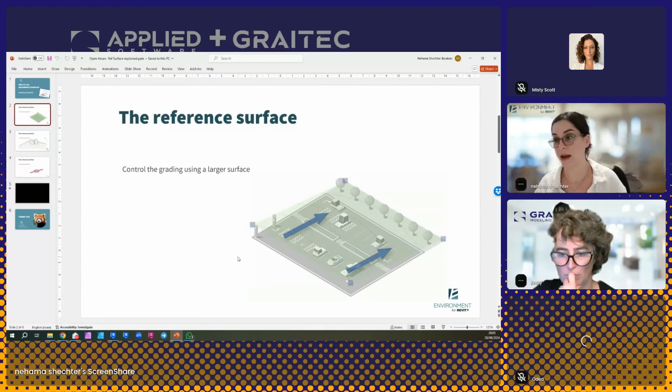So essentially, the reference surface is like a theoretical surface that represents the grading and the slopes of an entire area. Just like this parking lot can be graded with just 4 points, but then every part of it can just align to this grading, right?

I gave a really good example, imagine a roof, where you define the slope of the roof, but then every shingle on the roof conforms to the same slope—you don't have to define it over and over again. That's what we're doing in Revit to create a very efficient modeling process. Just like in this example, I already have the grading of the building pad.

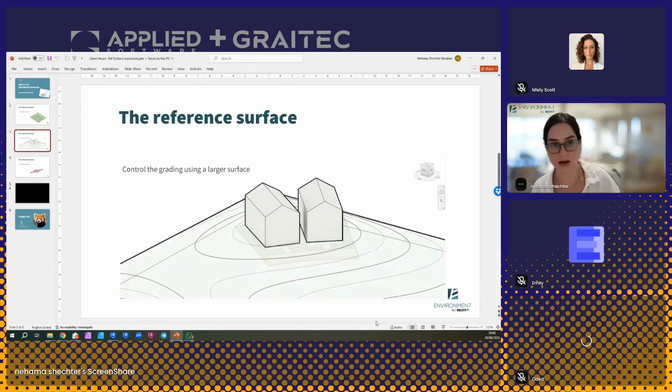As my design gets more details, I add the more details to it, but I don't have to redo the grading of every area, yet I still have a 3D model. So these Revit topographies and this method of working is really helping me both in the design process, but also in the modeling process as well.

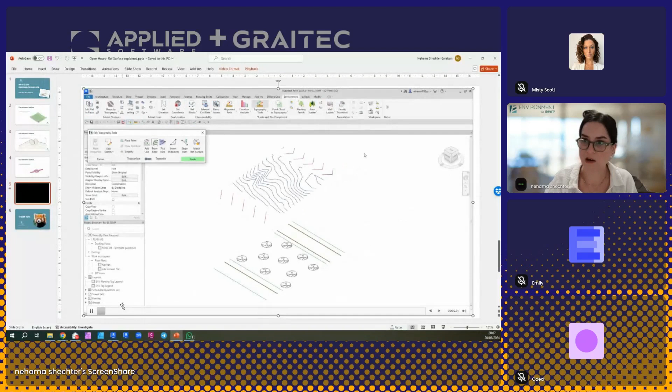So for example, if we take really complex surfaces like this one, I don't have to calculate the elevation points for each part over here. I could just create a reference surface with 4 points and have everything conform to it. That's some of the things we talked about last time with complex topics in topographies. I actually prepared a really fast example of how we can work with topographies with the toolset that makes this topography and grading very flexible.

Now, I saw a lot of people asking in the Q&A, can we import this topography data from other software? The answer is yes. We can import that from Rhino, from AutoCAD, from Civil 3D, and use it and continue to design with it in Revit.

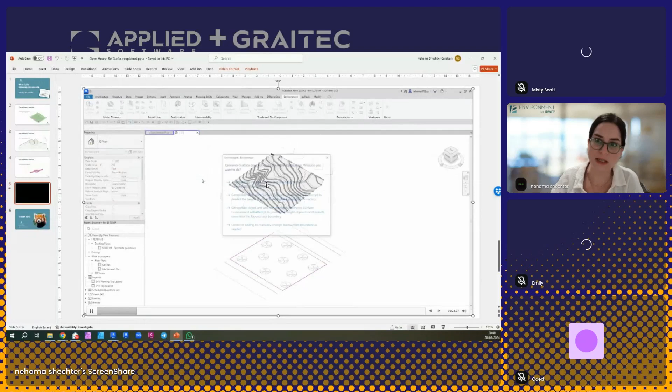In this example, I'm showing you how I'm designing a topography from AutoCAD using Environment tools. You can see how originally this topography was created with contour lines, but now with Environment for Revit, I just added points on this AutoCAD surface. So once I have this 3D topography in Revit, I have so much information that I can extract from it.

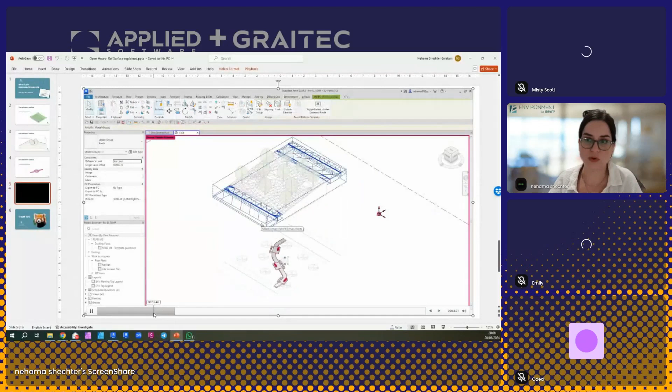I can extract the volume. I can create a proposed topography that will later allow me to understand the cut and fill values of everything. So essentially, you can see an example over here of how, in 2 minutes, I took an AutoCAD survey and just modeled my entire site. When my site is 3D modeled in BIM, I have so much information I can extract from that - the amount of trees, the volume of the land.

And over here, you can see an example of how I can take my own design and start to design on top of this 3D survey. So I'm designing a 3D path connecting these 2 streets, and I'm doing it really easily with one of Environment's tools called an alignment. And this alignment is 3-dimensional.

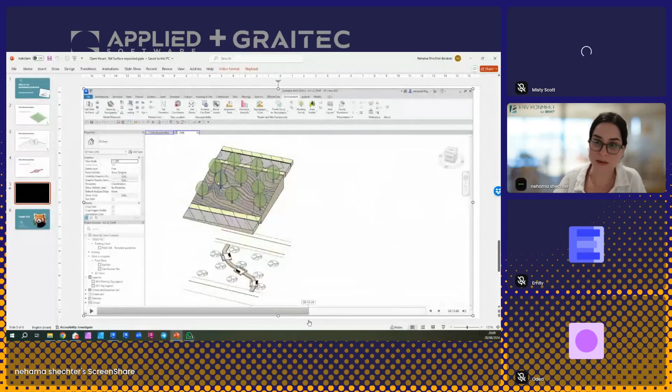And because it's 3-dimensional, I didn't have to calculate anything. I just created a path, and now I can just take the existing topography and conform it to the new path. And I can show you another workflow of how easy it is for me to just get my design on top of the existing data.

Now that's on a very small topography, but it can be done on larger scales as well. And then each and every part of this model can provide the information of the cut and fill calculation for this part.

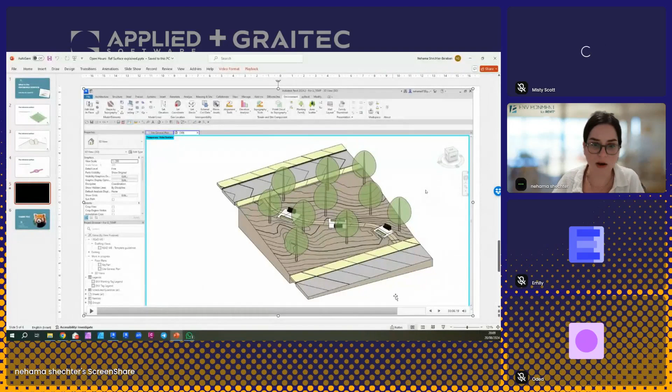So we talked about the reference surface. We talked about the amount of tools that we have in Environment for Revit that could give you all the flexibility of the design, and that's the toolset. Basically today we have over 70 tools that are built in naturally into Revit that allow for very flexible design. We have tools for planting as well, but we're going to talk today about topography in general.

Emily, do you have any interesting questions on the chat over there?

Hi, I have lots. And I just wanted to say I put it in the chat, but yes, we will be trying to answer all questions after the fact and send it out with a recording a few days from now. But give us some time, there are lots of questions. So, some of them are disappearing on me as I'm looking at them.

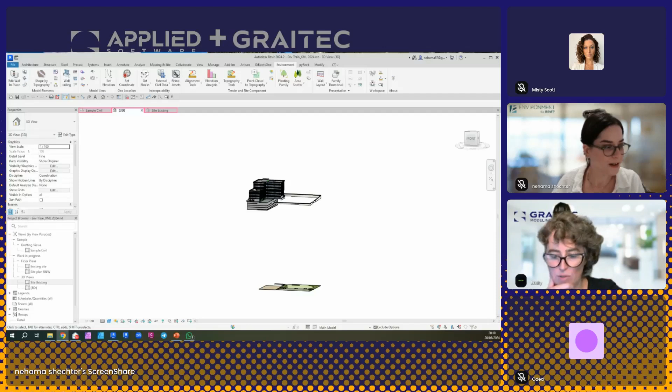So there was one there that I saw about topography - related to structures like tunnels, can we handle underground elements? Is that too much for now? No, it's actually a really nice question.

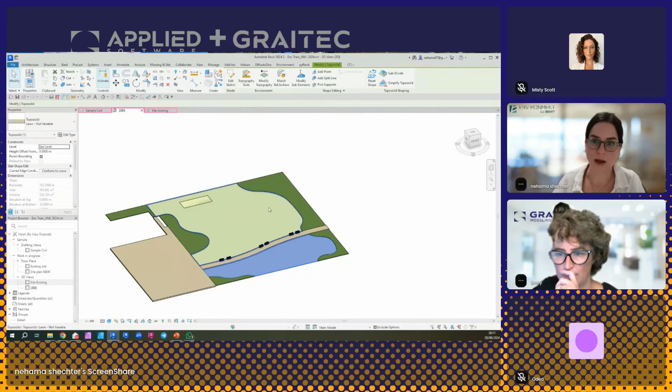Let me create a fast example. So in Revit 2024, Autodesk introduced the element called the toposolid, and essentially it's a solid topography. So let me just create a square shape topography very quickly to give you an example of why we care about the fact that it's solid. What does it give us?

So let's take a type - we have a lot of types of topography that we can define, we can define the layers, whatever. So let's just take the gardening and soil, that's a very basic topography that I have over here.

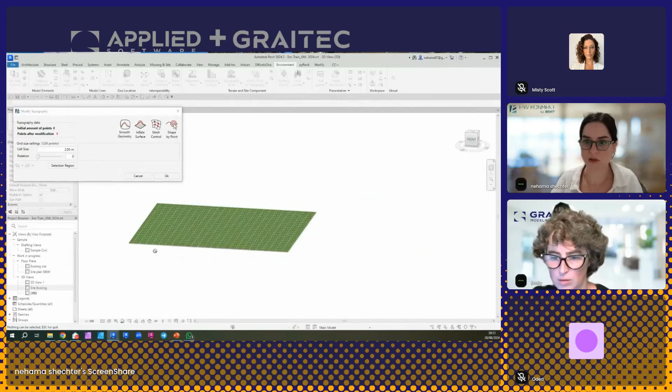And the reason I care that it is three-dimensional, let's really quickly use Environment's modify topography tool to kind of inflate this surface. So the example would be nice. Let's see the preview - yeah, so I'm going to create this mound over here.

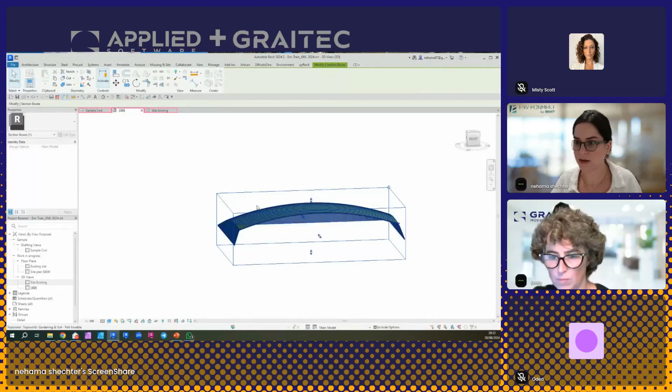All right, we want to talk about tunnels. Let's do something like that, and let's use a different type of topography. Let's use the variable material.

So why do we care that this toposolid that Autodesk introduced is a solid element? Because a solid element has layers, and these layers have a volume. If I click on this toposolid, you can see all this information over here: the volume, the area, the perimeter, whatever. And as long as I have this volume, I can cut into it

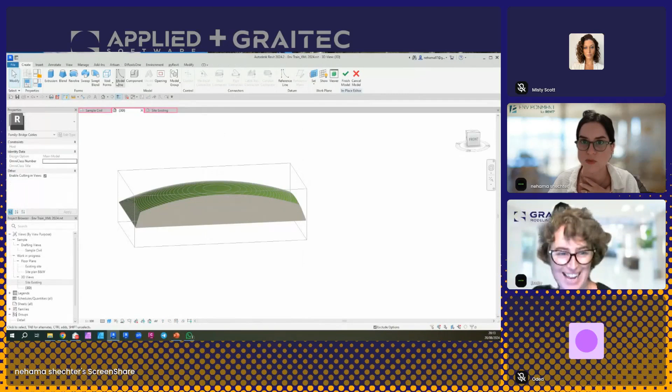with a void element or something like that. So, wow, that's going to be a scary test to just really quickly create the sweep, I think, right?

So let's sketch a path. Let's do something like that. And then let's give it a profile. Let's create a profile, let's do something like that.

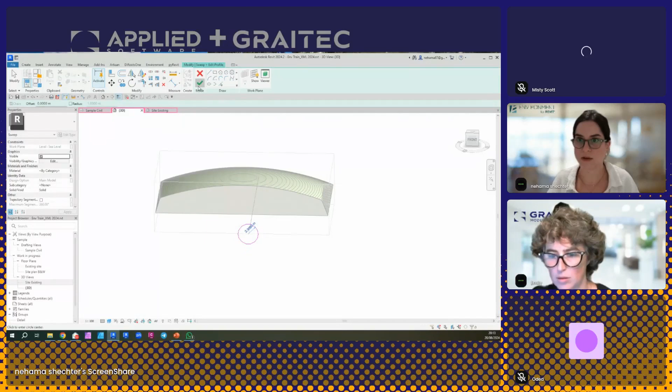And then let's turn this one into a void element and have it cut this one off. But it's under that, right? So how could it cut it? So let's lift it up. One second. I'm going to lift this one up a little bit.

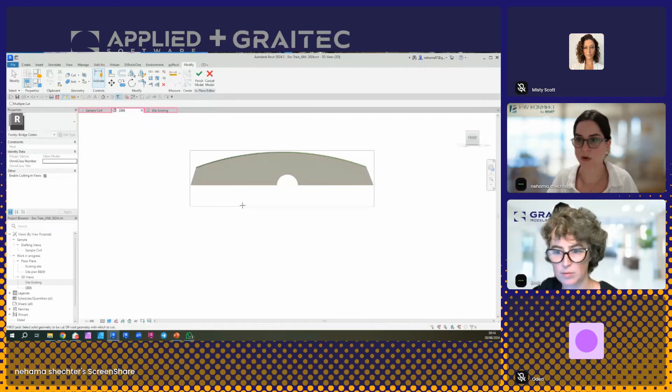And then have it being a void element, and you can see how it can cut into the topography, right? Just like that. Oh my God, that was a scary one to do live, right? So that's the concept of how you can do tunnels in Revit, and then I can actually get the calculation of the cut and fill of this element specifically in Revit 2025.

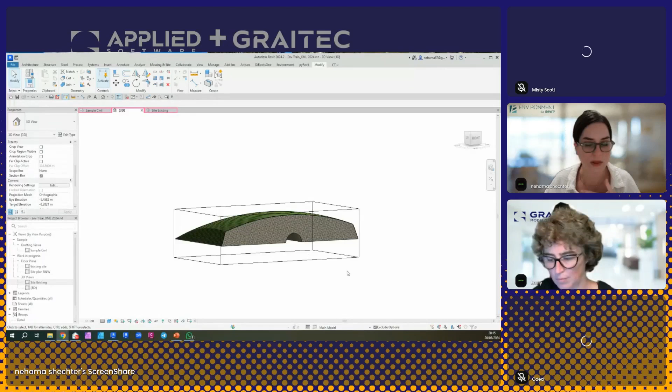This entire topic got a lot more sophisticated, and you can definitely read more about it on our website. We did a live webinar also with BIM Pure about that. So go to archintelligence.com, go to our news section, and you can see some information about Revit 2025 and how it can work with this void and cutting elements. That's a very cool feature we've added in Revit 2024 and 2025.

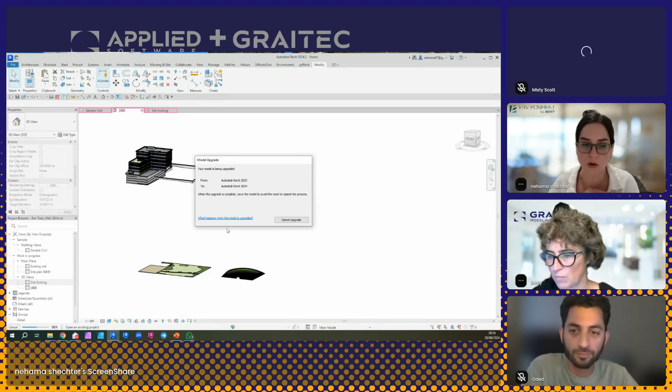I think that's maybe one of the, I wouldn't say one of the first features, but it's pretty old by now. I'm going to open a file to demonstrate it, but in the meantime there's also something in our website homepage, a whole video where we explain how to do elevation and slope analysis with Environment for Revit. It's actually one of the very old features we have.

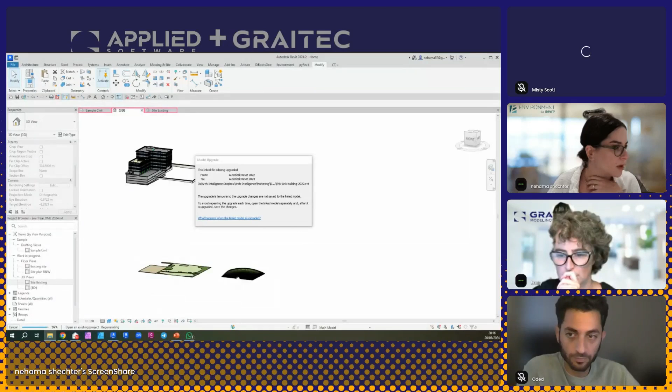Let's take a look. If you look at our full tool set, you can see there are a lot of drop downs, right? So if we take a look at the full tool set we have, we have the elevation and slope analysis, which allows you not only to visualize the analysis of the slope and elevation, but also to get real information about it.

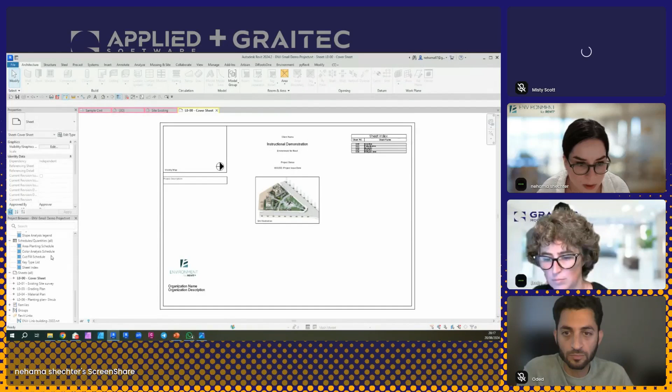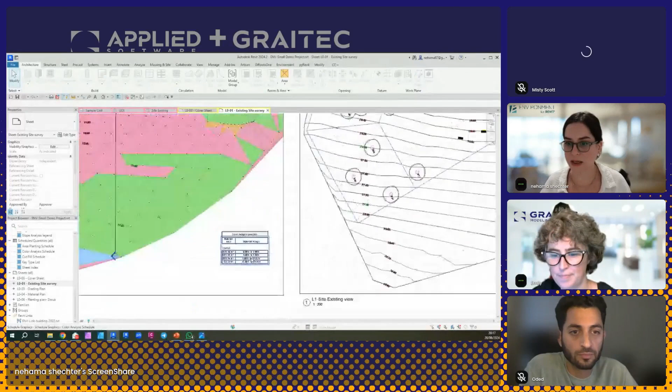For example, here's this file opened up, showing an existing site survey. Here's my slope analysis, and I can see real information about it. You can see how much of my area has a good slope and how much has a bad slope. For example, I know that's the amount of square meters with a slope that's going to be really expensive to develop. But then I know the rest of my area has a slope that's not steep, so it's easy to develop.

So this kind of analysis on this 3D topography is really useful at the first stages of the design process. That's the original topography—of course it's a CAD survey that we imported to Revit, and then we perform the analysis on top of it.

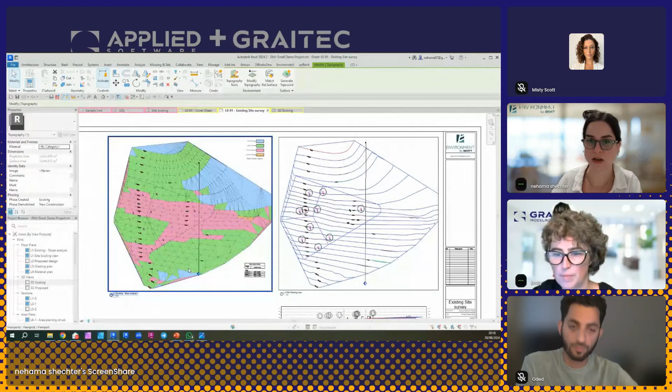Sorry, it might be another scary one to do live, but it talks about how to model some complex landforms, such as cliffs or terraced landscapes. How to model complex topographies?

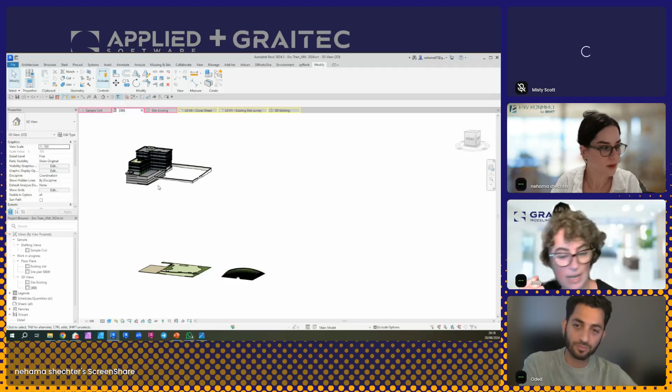Yeah, so I know we have a terracing tool in Environment for Revit. Cliffs, however, may be a little beyond what we can talk about today, but I thought this might be a good time to talk about something like terraced landscapes, maybe.

Yeah, that could be interesting. So I have to think about a good example, but generally speaking, there are two types of elements. When we're talking about cliffs, that's when I would like to have the survey of something original. A section usually doesn't look like that, it's not 90 degrees and 90 degrees. A natural cliff would look something like that.

If you would want to do that in Revit, my best suggestion would be to do it with a point cloud. With Environment for Revit, we have this amazing tool where the algorithm can automatically identify what is topography and what is a different element, like a tree. I can show you a really cool example, well, it's not really a cliff, but it's a river that one of our clients used.

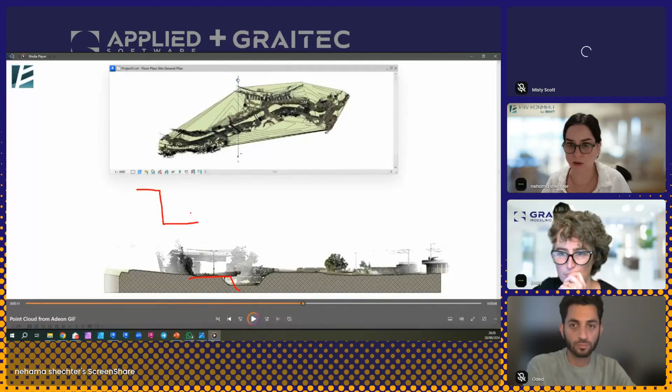Let me see, I think it's this one. Yeah, right, so over here we had a point cloud survey of a river, and with the Environment feature we could very easily create the topography of it. You can see that the sides of the river really vary. Because topographies are made from points, as long as you don't have a wall, as long as you don't have a 90-degree situation, it's very easy to model. Actually with Environment you could do it in 2 clicks.

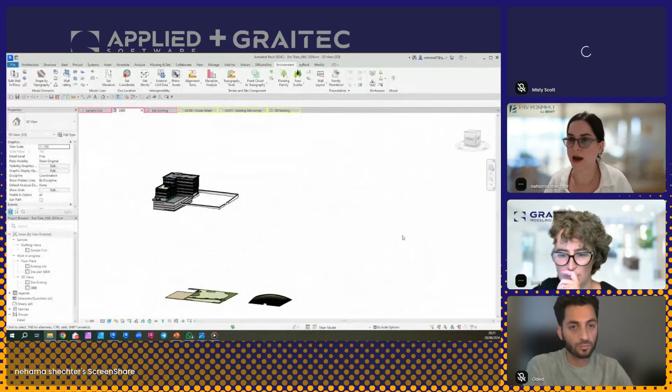And then if you're designing a terraced landscape, that would be something else. So let's think about how you would build something like that. You would probably build it like you have the ground with grass or something, and then you have a wall, and then you have the ground again. That's exactly how I would model that.

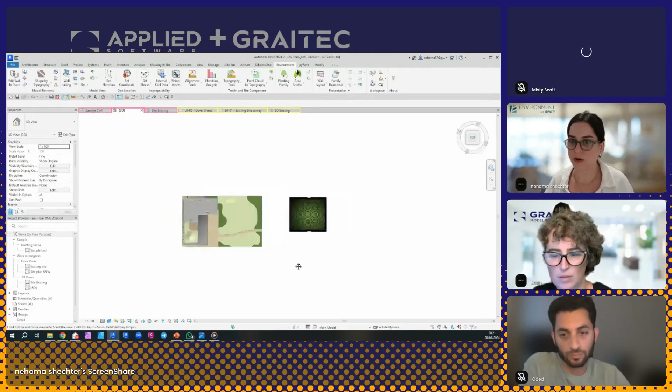So let's create a topography that has, I don't know, a normal slope. Let's do like 1%. Don't worry if you're working on an imperial system, you can change the units, it doesn't really matter. So I have this topography with a slope that I'm happy with. And then what I would do, I would just create a wall.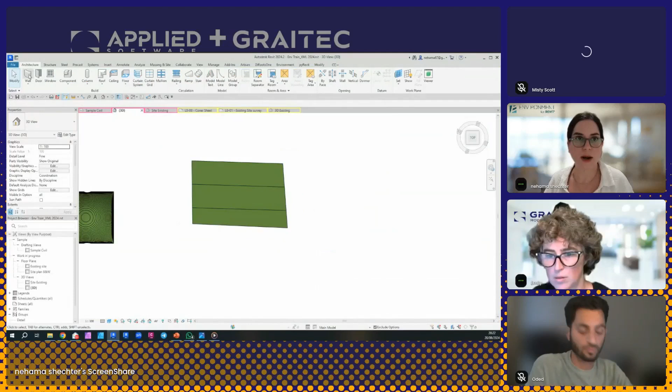Let's go ahead and create a wall over here. And make sure that this wall is in the correct elevation. There are many ways of doing it. With Environment, you also have many automated ways to do it. And then I would just create the other part of the terrace, so let's do something like that.

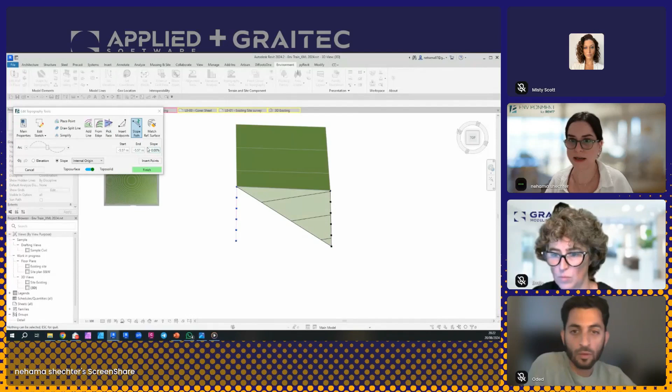Let's do 1 point over here, 1 point over here. Go to top view and you can see how I'm placing the points. I'm not really calculating anything, but still I'm getting the correct slopes that I'm going to need to use, and I'm getting all the contour lines that I need in order to document everything in my model. So everything you see here, that's why we love Revit so much, because it's good for documentation.

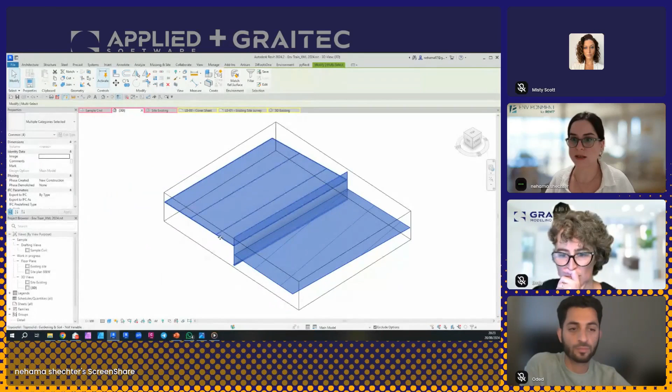So now just imagine how easy it was for me to, let's even create, I think, a structural foundation over here. Look how easy it was for me to create this terraced landscape, and it's ready for documentation. It's all ready to be sectioned and shown live. So yeah, that's my complex answer to that one.

I have another one that's been repeating a few times. Somebody asked about cut and fill, and also construction phases regarding earthwork.

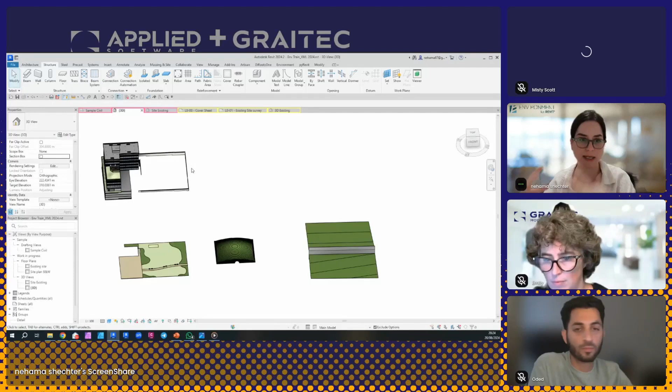Yeah, so first of all, it's a very good question. One of my favorite features when I started to work in Revit as a landscape architect is that it's not only 3-dimensional, I look at it as 4-dimensional, because we always have the dimension of time in Revit. So essentially, I have 2 different models that coexist and integrate, the existing phase and the new construction phase. And then you can have as many phases as you need in your model.

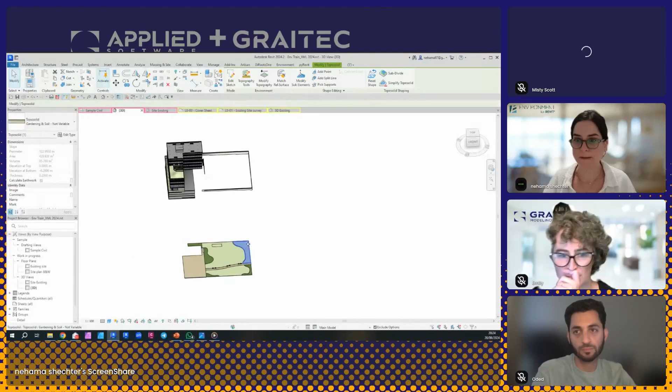So let's go over here. That's where I have the existing phase, the existing trees, the existing ground, and everything can be calculated. Right above it, I have this model. So essentially, if I have a toposolid, I can calculate the amount of cut and fill, the amount of earthwork.

I think in this one I should definitely upgrade that into a toposolid. So I'm going to use Environment topography tools to switch the toposurface to toposolid tools, and make sure it's defined as existing and demolished in the new construction phase.

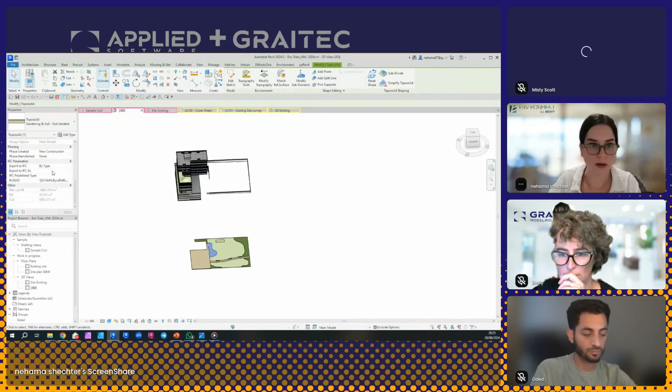I'm just going to take one of the toposolids, and you can see that I have the cut and fill data. There's also an environment feature that can really help me get a more accurate analysis on this area. So essentially, as long as I have 2 overlapping topographies, that's just going to be a very easy schedule.

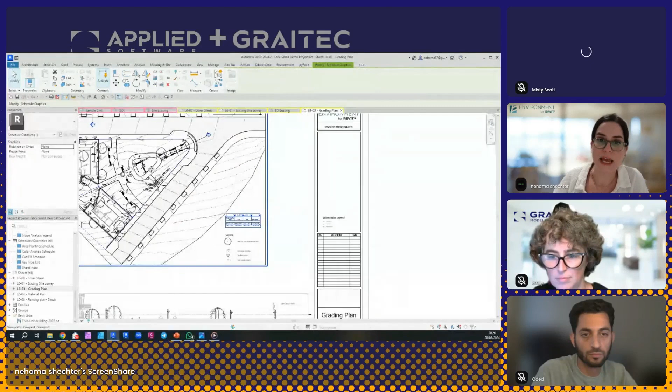I have another example in this project that I opened here, which is a little bit more done, in this grading plan. Again, I have an existing topography and a new topography. When I model everything correctly in my phases, in 2 clicks I could just create this cut and fill schedule, which will also automatically update if anything changes in my model.

So as long as I have existing and new construction living in the same model, modeled correctly, each and every piece of my model gives me this information, and in just 2 clicks, I can get it into a schedule in the very first stages of my design and modeling process.

Sorry, I have a little cold today. I don't know if you guys notice. That's okay, I hope you feel better soon. Yeah, as long as summer is over. Just kidding.

Emily, do you have something? Well, I've seen a few. Another one that's sort of ongoing is compatibility with other softwares, right? Import and export, we know we can answer some of them. Just to confirm with everybody, there's a lot of import and export. And I lost my train of thought. I'm just going to turn this over to you, Nehama.

I ran that one into the ground. Maybe specifically with AutoCAD, because you briefly talked about bringing in topography from AutoCAD, and I think a lot of landscape architects are struggling with this because they already have their survey in AutoCAD and are bummed to remodel it again in Revit. So maybe that, and also XML from Civil 3D data. That would be great. Yeah.

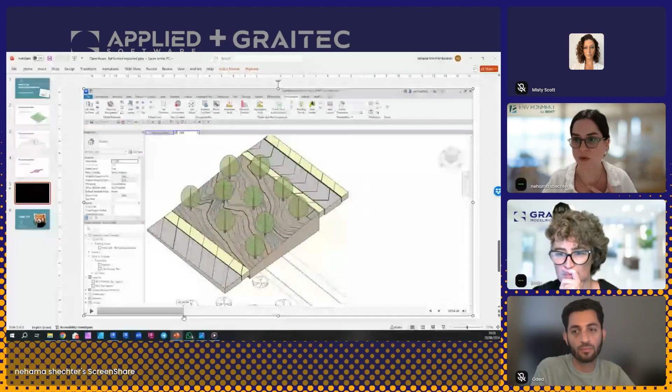Using Environment features, I could turn these blocks into Revit families, which are schedulable. I could turn these CAD contour lines into a Revit topography. And then using Revit's regular export features, I could just export that back into AutoCAD.

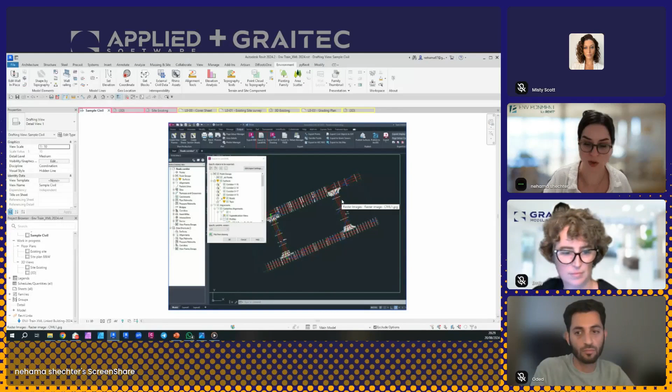But then there are things that are a little bit more complicated than getting the blocks from CAD into families. For example, if I'm using external civil data, let's go over here. So basically, if you're working with a civil engineer that provides your topographical data, in some cases it can be the survey. For other landscape architects, the engineers are responsible for the grading and levels.

So all they have to do is export their surfaces into a LandXML file format, and then I can use it to create my topographies. So let's go to external civil data and import, for example, the finished grade for the design that I have here. And you can see, it was like 2 clicks, I was able to import a topography.

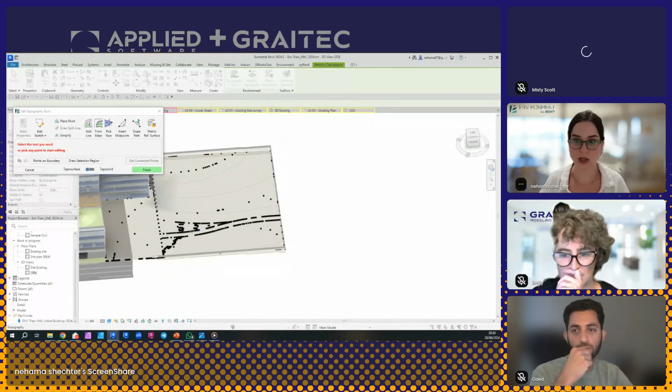As I click on this topography, you can see that I'm able to use Environment topography tools to edit this topography and take a look at it. I could just edit that, right? I have points, I can delete them, I can move them, I can change them, I can do whatever I want. So as long as I have this Civil 3D surface in Revit,

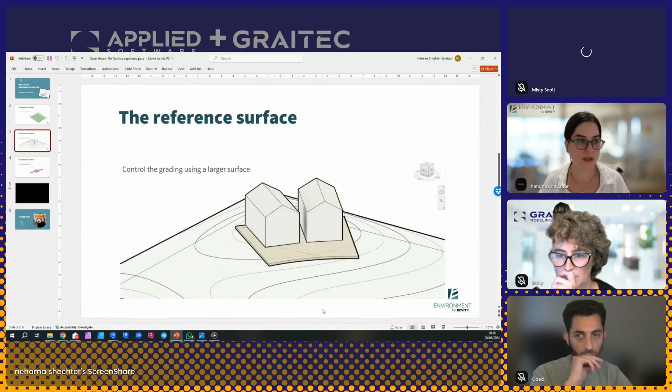this could potentially become my reference surface for other elements that I'm designing. So as long as I'm touching it with Environment for Revit, it's potentially a reference surface, right? So let's take these topographies. That's my flat layout. Let's say I'm the landscape architect and that's my design, but the engineer did the grading, which sometimes happens, right?

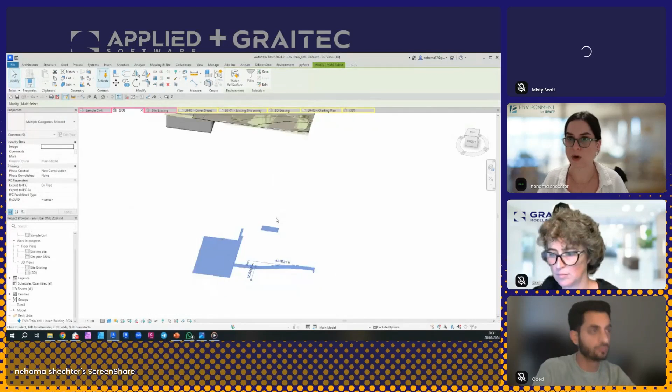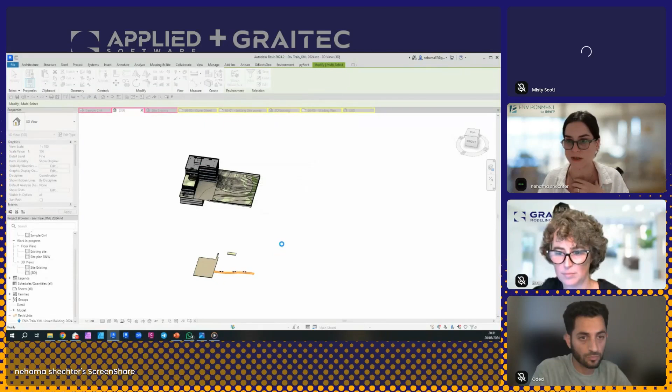And then I can take the match reference surface feature and select this topography I just imported, and in about 2 seconds have my topo solids conform and adjust to the grading design from the civil engineer. Then I can take these ones, which are paving, and do the same, but this time I'll give them an offset because I want my paving to be a little bit above my original topographies.

So I'm using the match reference surface feature and just conforming all these topographies together. Let's turn this one off, I don't need it anymore. Of course, I can reload it and update as I go.

Let's talk about this reference surface that I created from Civil 3D. If I isolate this part, you can see it looks kind of weird, and we're like, why is that? It was supposed to be flat. So if I turn on topography tools, you're going to see the original surface from the civil engineer, and that's my boundary that I designed. The combination of the two is giving me this design.

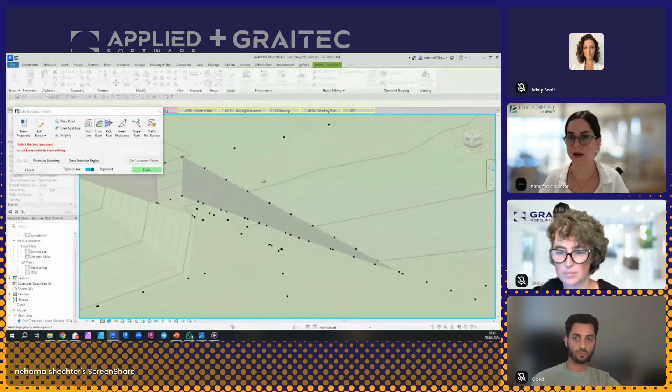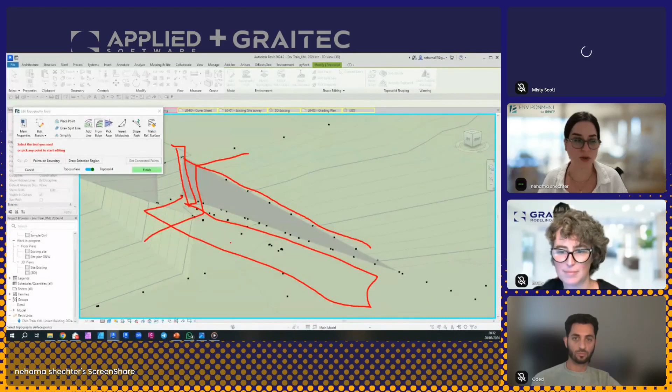So why do they have a problem? Well, in Civil 3D, they did not come to my webinar and did not understand that they should have one topography, then a wall, then another topography. They just tried to create a wall using a topography, and that's very common practice in Civil 3D. However, it's going to cause us a lot of problems.

So I could just go in and manually correct everything, click finish. And because I always have access to my reference surface, I can adjust it and then export to LandXML, select my adjusted surfaces, and send them back to Civil 3D. They will fall exactly where the civil engineer needs them and wants them.

Sorry, my computer is a little bit tired, but essentially you have the import and export features all available to you within Environment for Revit tools. So you can make adjustments, import that, and use it as a reference for your grading. You can even import entire streets or corridors or roads from Civil 3D.

And the same thing you could do with Rhino. If my computer decides to get back to itself, I can even show you the Rhino example on how to import topographies from Rhino. I'm going to stop sharing for just like 2 minutes, maybe it will make things easier for my computer.

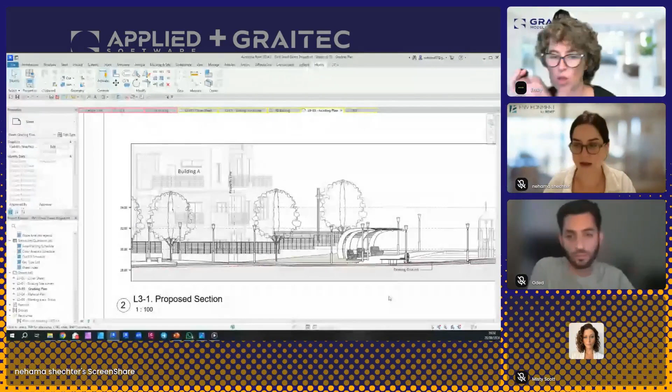A lot of these tools are built into the Revit software. Without Environment for Revit, you can cut a live section through any part of your building or topo surface or topography. Although we cannot model everything to the nth degree, there are tools to cut that section through what we have modeled and then add elements we may not have modeled. So if you've modeled the foundation, footings and the surface around it, but need to add a weeping tile or gravel around it, these are 2D elements that can be added on top of any given surface.

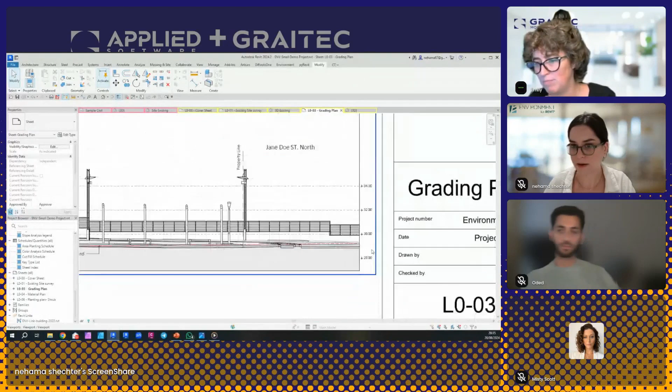And same with 3D. Once you've modeled something, you may be looking at it in plan, but within Revit you can navigate around and very quickly jump into an already existing 3D surface. So the line between 3D and 2D in Revit is sort of blurred because we are modeling in both at the same time. Even though you may be thinking about it in plan and drawing a wall in plan, it always has a height, and we can always cut a section through it without a lot of effort. So that's just to cover that one.

A few of them, lots of questions like that. Another question that repeats a lot is if there are some tips for dealing with large files or large sites and complex topographies, in small pieces.

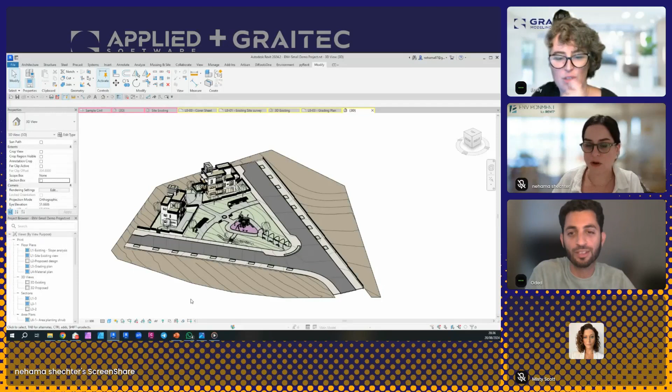Nehama's on mute, so the first thing I'll say is small pieces, and I'll let Nehama take that over. Yeah, I realize I'm muted.

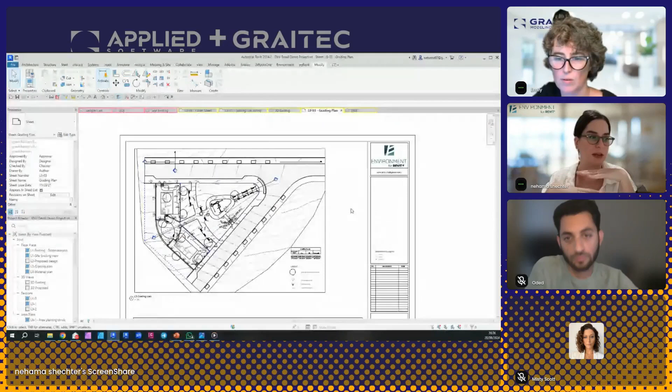So I want to talk about what Emily just said. In Revit, we're working on a 3D model, but we have a lot of ways to look at this model, and essentially that's how we document everything. If I want a grading plan, I just look at my model from above and make it black and white, or add some more information. Essentially everything revolves around my model. I could just cut it, like Emily said, and add some 2D details into it, so it's very efficient this way.

Now let's talk about the question you brought up about dealing with very complex sites. I do not think Revit is here to replace Civil 3D. If you're designing a new city in terms of roads, maybe Civil 3D is the right software for you. But to get to a detailed design phase and construction design where you can actually build something, that's where Revit swoops in. We've seen a lot of success with very large models. Officially, the Revit limit is 20 miles from end to end, and you usually don't get to such a big project. So how do you deal with such big topographies?

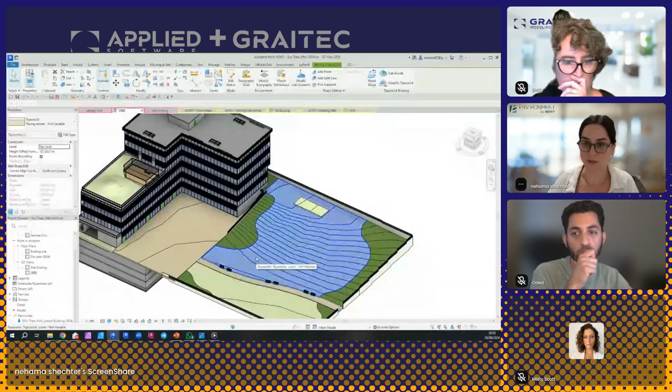Well, that's very easy - you divide them. You model them one by one according to their function, material, slope, whatever you want to do with them, just like what I did over here. When you're working like that, the grading logics all make sense. So instead of trying to build one very big topography like a civil engineer would in Civil 3D, I could just start by building this plaza, and that's it. I know my elevation over here, and I know it should slope over here, so it's very easy to build.

The next thing I want to build is this path over here, and that's very easy as well, because in Environment I have the from-edge tool and the slope tool. I could just touch this edge and slope over here, so I have a path, etc. That's how I build my models. With this method, we've seen a lot of success with architecture and landscape architecture companies all over the world building very complex and very beautiful models in Revit.

Any other question? I think somebody noticed that your floor plan looks really nice and the textures are all aligned, and everybody's aware of the issue Revit has with demonstrating textures on sloped floors. Somebody asked if Revit fixed it. The quick answer is no, but...

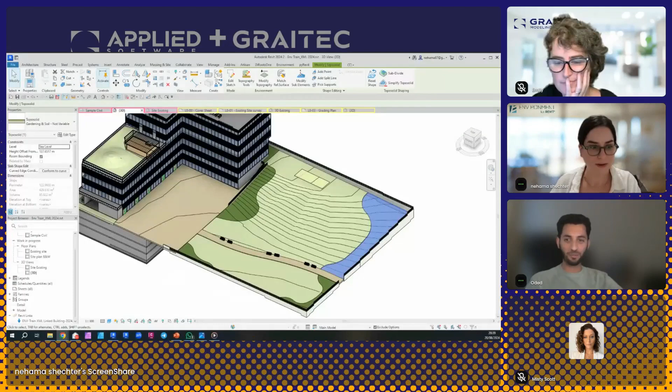Environment for Revit has a fix until they do. So essentially, for those of you who don't really know the issue, I could quickly show you what it's about. Let's go to the floor over here and show the pattern on the floor. You can see the patterns in Revit get twisted when you have a lot of elevations, when you have shape-edited floors. So let's go back to the floor feature, and what I do is just turn it off - I'll Control Z this.

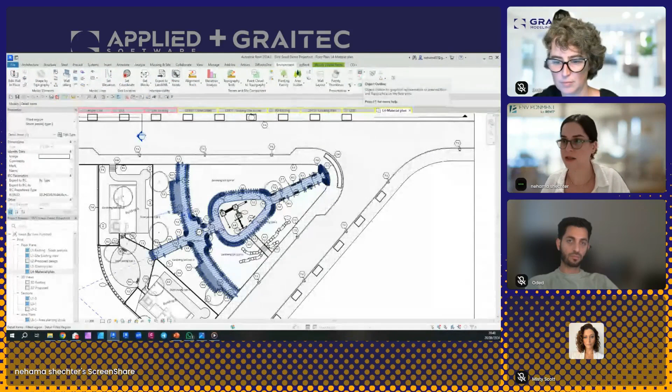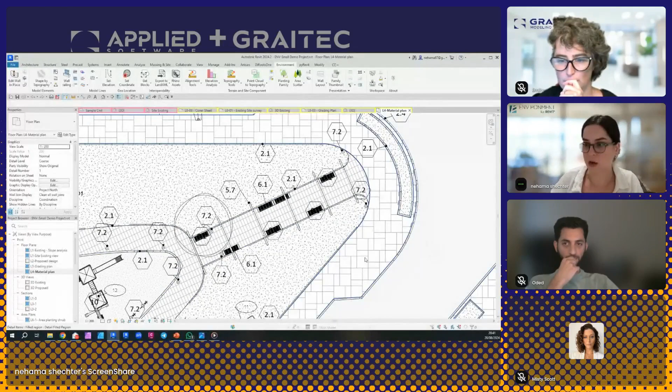With Environment for Revit, we have a feature called object outline, the small one up here. What this tool does is automatically create a filled region that covers the entire floor, topography, or toposolid. It creates a new filled region type with exactly the same definitions as the floor or toposolid type, and it updates if I modify the floor, the boundary, the type, or the material - anything I do with my floor will actually update automatically. So it's a view-specific solution, but it's a one-click solution, and it can give you a very good result working with patterns and creating beautiful material plans in Revit.

Perfect, thank you. I think you mentioned that to deal with large projects, it's a good idea to use links. Somebody asked how to align linked models in Revit - I think the question is about geolocation, in the sense that if there are a few professionals working on the same project, how do you make sure all of them are aligned? Yeah, so Revit is really great with collaboration.

You can take a look again at this project over here. The architectural model is not a live model - it's a linked model by the architect. And you can link as many models as you want, as long as you're geolocated and within shared coordinates.

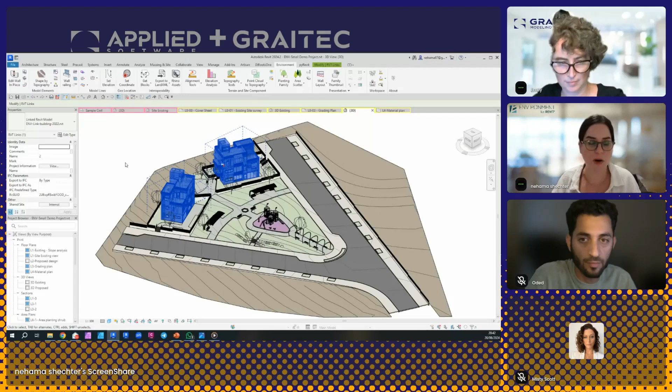Environment for Revit really improved that area as well and made collaboration better. With Autodesk, you have this very powerful cloud environment where you can collaborate with so many disciplines. I have projects where they used MEP for the sewer and water systems in the streets, road engineers from Civil 3D, and architects building the building.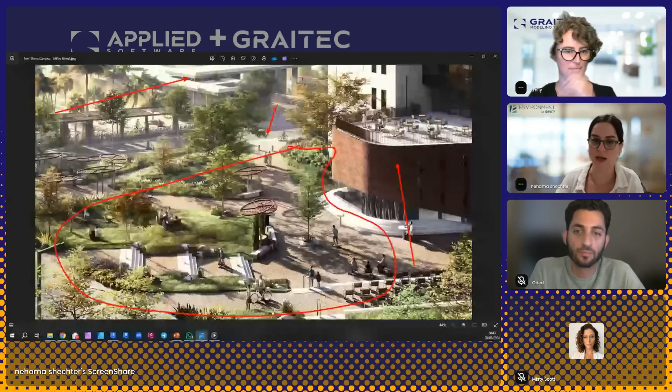Let me show you an example of a very big project, using both the cloud environment within the Autodesk ecosystem. That's an example of one project done entirely in Revit, where you can see one architect, a second architect, the road engineer, and the landscape architect, all working together in this beautiful ecosystem where everyone can see everyone's changes live. That's why Revit is so great, and why we chose to develop a tool specifically for Revit, because of its powerful collaboration options.

Going back to our website, if you want to learn a little bit about geolocation in Revit, in our news section we've invested a lot of time breaking down how this collaboration works. If you're really nerding out about it and want to thoroughly understand how Revit collaborates, this is a really good article to read, to understand how to use the environment set coordinates tool to get better coordination.

Emily and Oded, are there any very interesting questions? Because if not, I'm kind of eager to show the alignment tool.

I have a question related to that. Somebody did ask about modeling complex road alignments on a sloped site. There we go, perfect. That's from Aidan Morgan. It sounds like I paid this person to ask this specific question, right? I just happened to paste it into my little Word document.

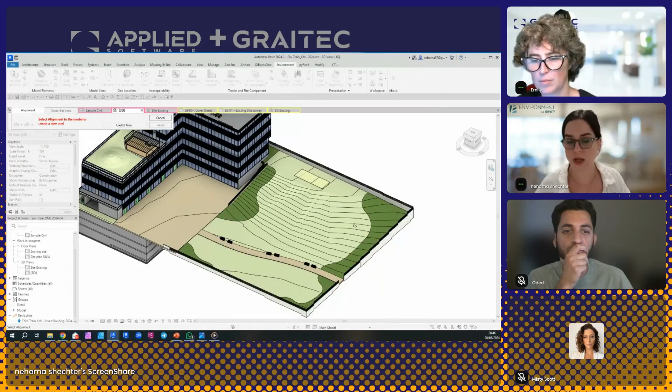We worked for a very long time to develop a tool that would make path and road design in Revit as easy as it should be. We finally have this tool, the alignment tool by Environment for Revit. We still have a few more steps we want to achieve, but already it's saved me around 80% of the time it took to design a path in Revit. So let's quickly create a road that connects this part and this part.

Before I start, I'm going to move to a plan view, so it's like looking at my site from the sky. This is my site—plan view, 3D view, the same model. Since I'm in Revit, it's very easy to know the elevation of this area and the elevation of that point. That's just plain Revit—that's why it's great, because it's 3D, we have all the information.

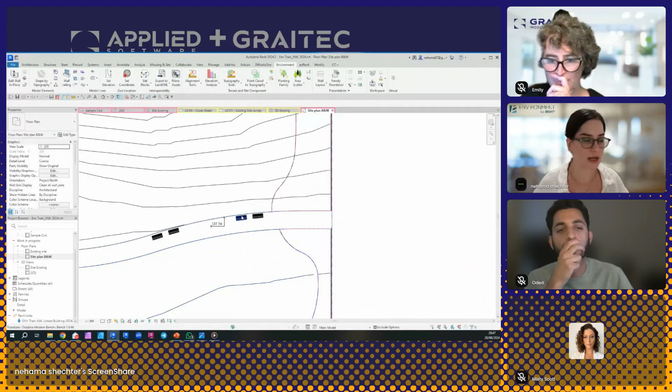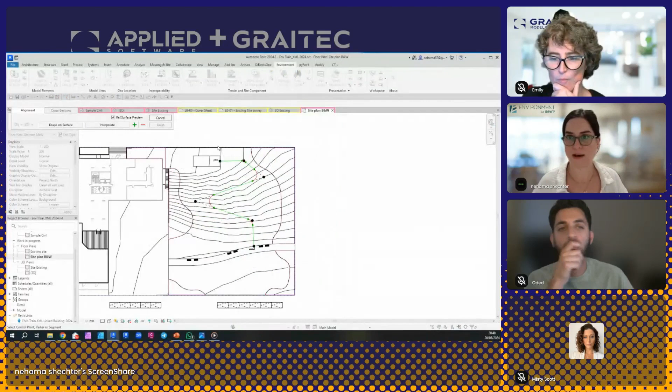Now let's create a new alignment. The first step is not 3-dimensional, it's actually 2-dimensional. I'm just going to quickly sketch how my path should look. I don't really care if I'm too accurate, because this is Revit—the name comes from the words 'revise instantly'—so I can adjust it later and make it better. We have undo and redo buttons, so I can just do them. That's the overall path that I have. If we go to a 3D view, you can see it's pretty much flat, and then it has all kinds of parts like points and lines.

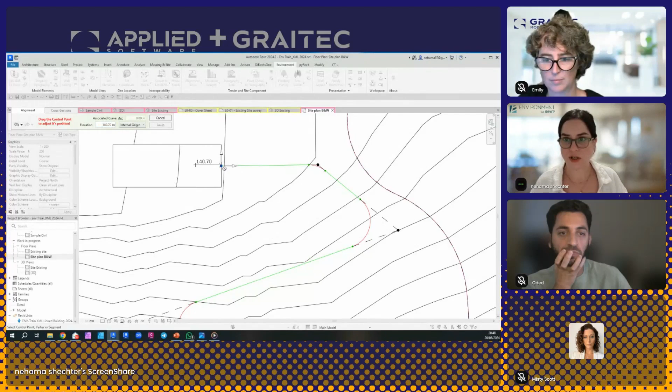And what I can do to start, I could just take the first point over here and give it an elevation. So I know that's the elevation that I have at the start. And that's the last point that I have. So it's going to be 70, 73, 74. And again, I just adjusted the first and last points of my alignment. You can see that everything else is still flat.

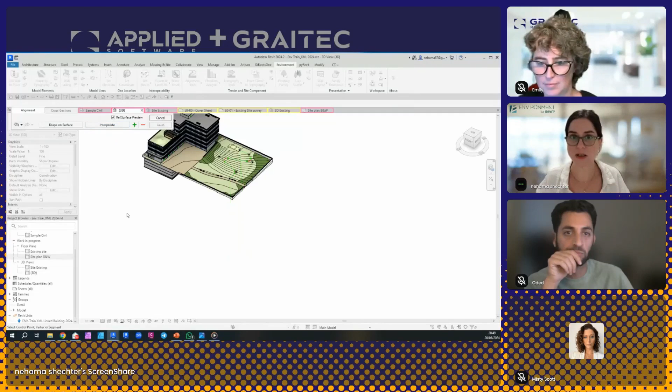But then if I click on escape, I get this wonderful option. Again, if you're not a landscape architecture student, I'm not sure if you know what interpolation is, but it's basically turning everything into a unified slope from start to end. So I'm going to click on interpolate, and it's just going to jump to be a unified slope. And as I click on any part of any segment, I can get the information of what the slope is. And again, if you're working with other units like 1-to ratio or something like that, that's what you're going to see over here. For me, I'm just working with percentage.

Then I can just manually adjust my path the way I want it to look like. So as I adjust it, I don't know if you guys ever designed a path, but it requires so much calculation of length divided by height equals percentage, right? I don't have to do that. I could just click on interpolate and see the resulting slope.

And then I can even do something different. I can say, I want the slope here to be maybe -1%. And then I want to interpolate everything else over here, right? Let's filter that, take only the segments, and then go ahead and interpolate only the segments.

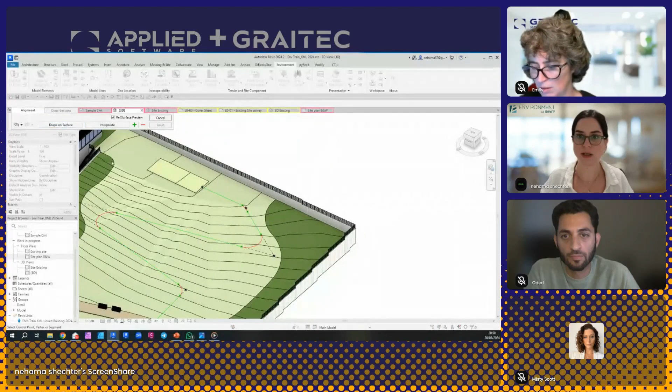So then I have like negative 2% slope, which is great. That's the result I was hoping for. And then a different slope over here. And then here I have like this crazy slope. Let's change it to negative 3% or something like that. And then negative 5. So I can really be very, very flexible with how I'm working here.

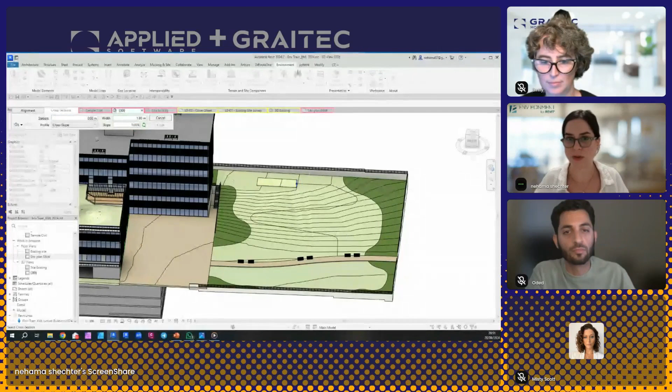And then, all right, let's say that I'm great with my alignment. But what's the next step? How do you take this 2D line and turn it into something that is actually a path? Well, I'm going to click on Escape, go to the cross-section option, and just place a cross-section here. And I'm going to do it really quickly. You can find on our website a more detailed explanation of all the things that you could possibly do with that. Let's click on Rebuild and see our path.

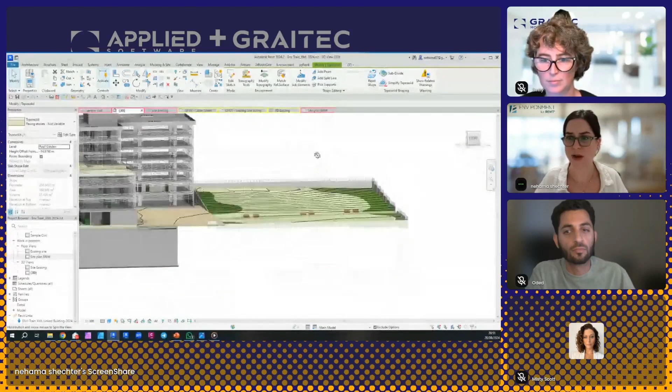All right, so then we have the preview of our path, and using environment tools, we can very quickly extract a topography from this path. All right, that's it. So it's a little bit under my existing topography. That's what the civil engineer designed, and I'm the landscape architect, and I'm like, no, listen, let's go to topography tools by environment for Revit and kind of adjust this topography to the path that I just designed.

So I'm going to take the from edge tool, maybe with a 10 centimeters offset, and just have this topography align with this path over here. Oops, sorry, I'm not really touching the correct edge. I touched a bad edge over here. That's it. All right, so we see all the blue points. Let me add them to my original topography and click on Finish.

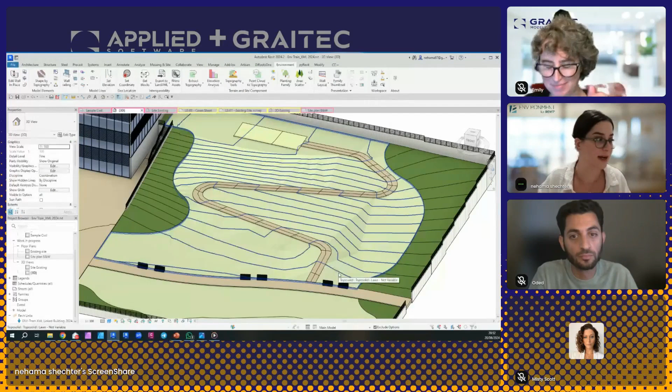And so I cannot even describe to you guys how long it used to take me to do this kind of design in AutoCAD. Emily, you're muted, but you're very excited, right? I wasn't even saying anything. I knew what you were going to say. Yeah, but how long it took me to design this in AutoCAD, and also how long it took me to design it in Revit without environment tools.

It was like 10 minutes what I did over here, right? And that's like a great starting point. So the more you master the tools, the more you can get good results very fast. And Emily, I know your partner is just learning landscape architecture and you know what it takes to really design a path and comply with standards and regulations. And it takes so much math, instead of being very intuitive, very 3D viewing with Revit and environment for Revit.

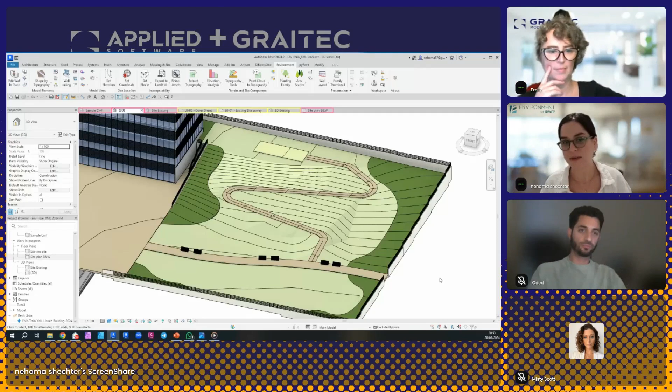So I think that's a great workflow to finish with for today, right? I think so. And for everybody out there who wants more information on Revit, because I think that's a big part of this, there's a lot of people out there who don't even know enough about Revit to understand what environment brings to the table on top of Revit.

Revit has fantastic modeling capabilities in all senses, and Environment for Revit brings specific landscape workflows to the table that Revit doesn't have, or that if you were to do in standard Revit, there would not be enough detail, or the tools to do what you want with efficiency. So what Environment does is bundle the workflow into the tools so you don't have to manually update every point like you would if just Revit was involved. It's really just an above and beyond tool to help your Revit workflow, and help you make it through the day.

We've got 5 minutes left. I have one question that's come up a few times, and it's probably a huge question, but to touch on: the effectiveness of using Revit and Environment for larger scale or master planning projects. I'm just going to say one thing before maybe Nehama adds. There are other tools in the Autodesk environment, one that I am completely forgetting the name of right now, I'll find it.

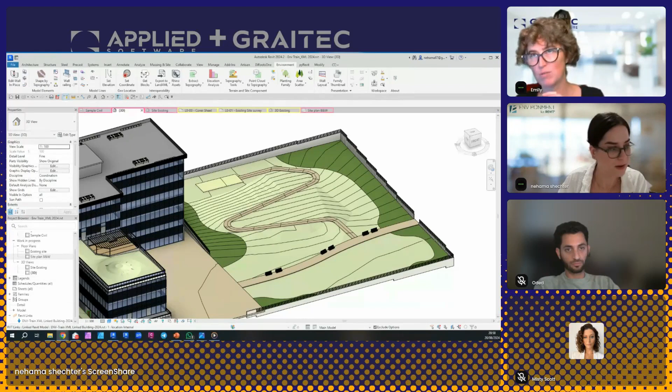I think people like Emily and GRAITEC are here to help you understand exactly what the workflow is that's relevant for every project you're doing, and the tools available to you. A lot of people think, oh God, I have to buy another tool. But in a lot of cases, if you're working in AutoCAD already and you might need Revit as well, there's a tool package called the AEC Collection.

That's going to come with Forma, Revit, and AutoCAD, a number of cloud tools at some of the entry-level elements. So you can jump right in and have access to a lot of data, including something called Twinmotion, which is a fantastic rendering software. For those asking about visualization and getting in landscaping elements like trees, Twinmotion is fantastic, and it comes with the AEC Collection. So there's a big package out there for you to start from.